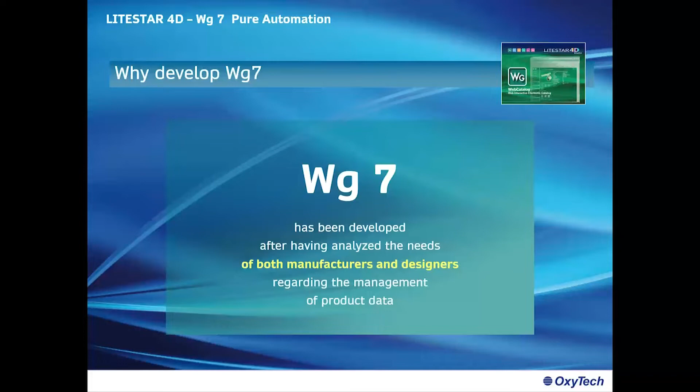Why? Wg7 has been developed after having analyzed the needs of both manufacturers and designers regarding the management of product data, and how product data passes from the manufacturers to the designers and how these data are used by both manufacturers and designers.

Increase of informative power. It's no more sufficient to manage only photometries. You have to manage also other sets of data which are becoming more and more important now, but also in the future.

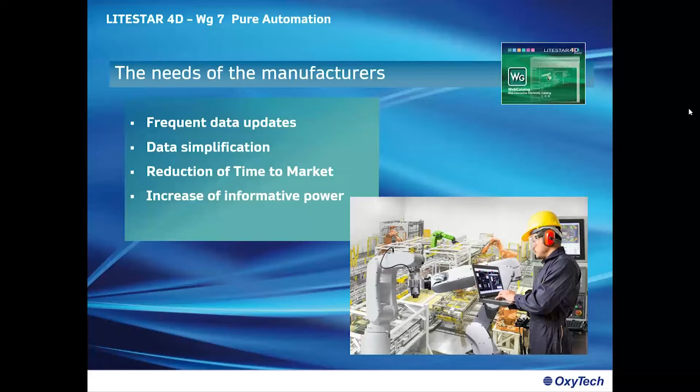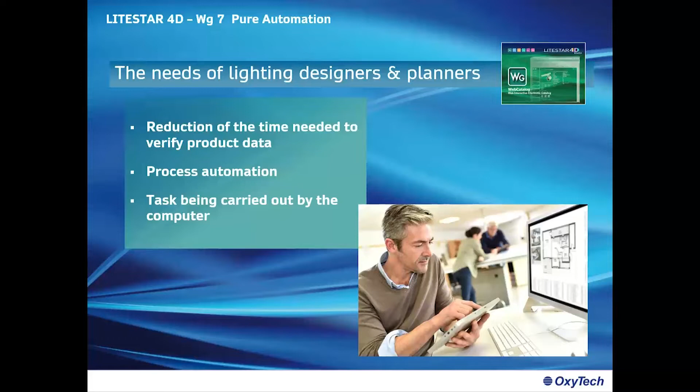We think that Wg7 is the answer. It's the answer because it is fulfilling all the needs that we described both for manufacturers and for the designers in the market.

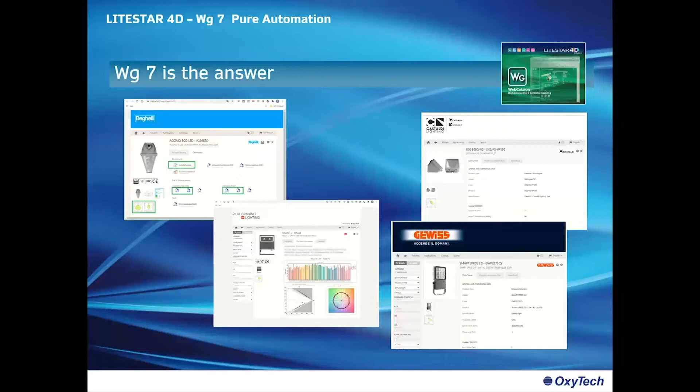Let's analyze in detail the needs of the manufacturers. Frequent data updates. So we live now in a world where the luminaires are no more based on conventional sources. So passing to the LEDs, we face a new reality, which is that LEDs are changing with a period much shorter than the one for conventional lamps.

I can tell you the story of a floodlight here in Italy that was designed in 1972. It was based on a high discharge lamp, 2000 watts, and it was removed from the catalog of this manufacturer only 5 years ago. So it's roughly a time of 40 years, which is no more the period faced using LEDs. So you need to update data more frequently than before.

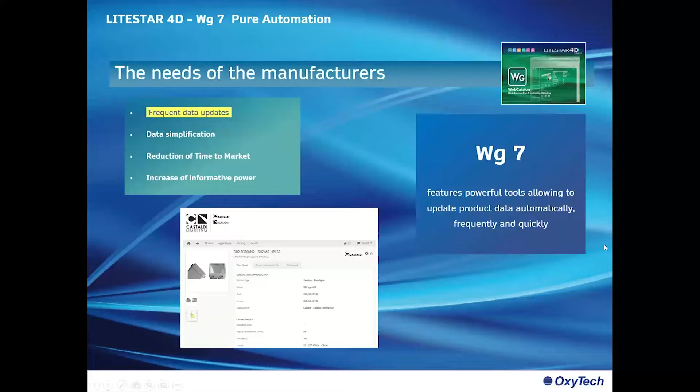Data simplification. Data simplification means that we have to organize the information so that the process can be managed in a very simple way. What does it mean? Let's take an example. Right now, we manage photometries through, for example, IES files or LDT files. And this is the part about the performance of the luminaire related to the photometry.

But more and more now we have to manage spectra because, for example, the information included in the spectrum is used for human-centric lighting, for example, the melanopic over photopic ratio for HCL. And many more needs are coming. But right now, the information about the spectrum is managed separately from the photometry, and so this is a complex process to manage.

So the idea we had was to develop for performance data a tool, which is the OXL file, an XML-based file, through which we can pack a huge set of information that can later be managed in a very simple way by our systems.

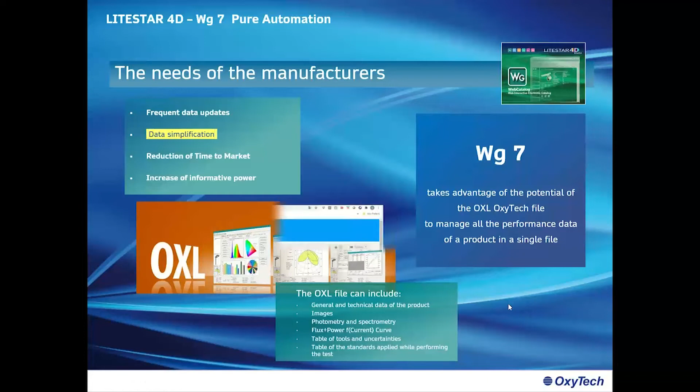Another big point is that once we start with an OXL file, we have the great advantage that we focused our tools, our features, the ones available through the web catalog, using a single file. So we created the so-called PV Web, PhotoView Web, which is a server based on our photometric and spectrometric data manager. Through PhotoView Web, it is no longer needed to upload the huge set of files that the manufacturers are now uploading to the internet.

So it is not needed to upload all the huge set of files to the internet, but only the OXL file. So through the OXL file, we can convert to any available document, to any available graphic, to any available data interchange file, but also create data sheets in 25 languages.

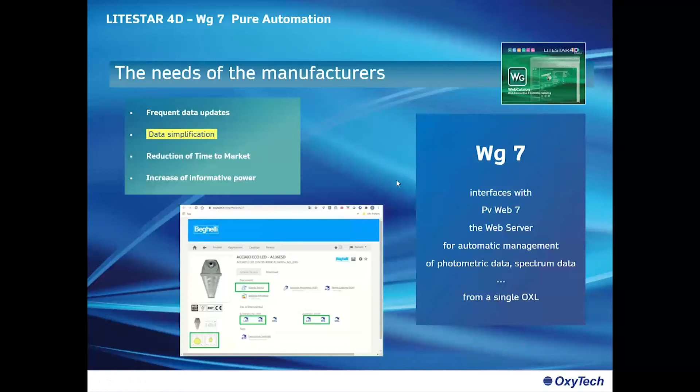Reduction of time to market. We know that the life of an LED is roughly around a year, an average of a year. So in this case, it is extremely necessary to come to the market in the shortest time possible. And this is a question of die or live for your product. Because if you delay the transfer of information to the market, let's say a month, it means that you have a month over 12. It is not the same as in the past, when you had products lasting for 40 years, 30 years, 20 years.

So if you delayed the preparation of the information for the market, let's say 2 months, 3 months, 6 months, who cares? But now, for LEDs, it is extremely necessary that you come to the market in the shortest time possible. And the usage of the OXL files and PhotoView Web allows the manufacturers to come to the market in the shortest way possible.

Why? For the simple reason that you don't have to spend time in creating thousands of files. It takes time. So, for example, I had a chance to discuss a few days ago with a manufacturer from Italy about the issue of the LDT files that they have to create, and the IES files also. And they said that in order to produce 200,000 photometries, they usually spend a month and a half to create them automatically, because they have an automatic process.

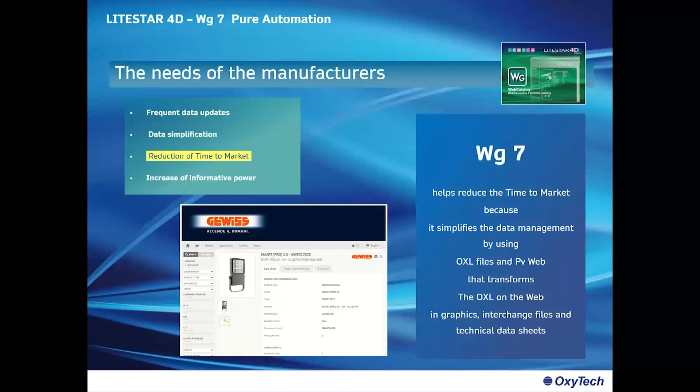It means that you do not even see the delay in producing the files. And this is extremely important, because it's not a question of losing seconds waiting for the files to be ready.

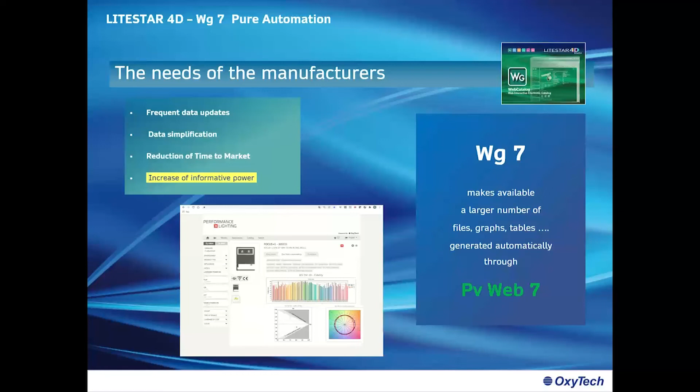Let's come now to the lighting designers. So it's clear: reduction of time needed to verify product data. More and more designers and planners that we got in touch with during the past months all say the same. They say that whenever they manage a lighting product, they have to manage the photometries, but once they finish their project, they come back maybe to the same project after 6 months, 8 months, because the client is willing to study the project and apply some changes, and so it takes time.

When the project comes back, the designer is never sure that the data that were used at the first step are still valid, still updated. So he needs to go back to the websites, to check, to download, to compare. Sometimes the manufacturers are changing the codes, sometimes they are changing the location where the files are available. So the designers are telling us, listen, we are losing a lot of time in searching the files, in updating the files.

What we developed is something that, through this simple feature, makes it possible to do that automatically. It means that whenever the designer selects a set of products and downloads them to the local database of LITESTAR 4D, then, using this Quick Check feature, he can automatically ask the web catalog if new data were published. And in case they are available, the system automatically downloads those files and updates the catalog. This process is done in a few seconds and can be done also through different web catalogs.

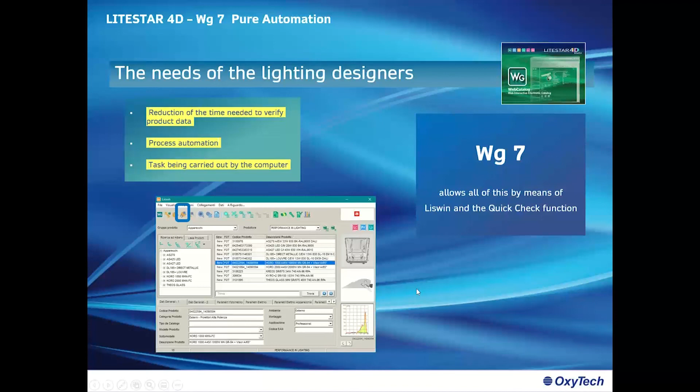We believe that this may bring us to a perfect balance for a simpler and faster world. I think that you could understand that really, in applying some minor changes, some minor features, we can achieve a great goal in data management.